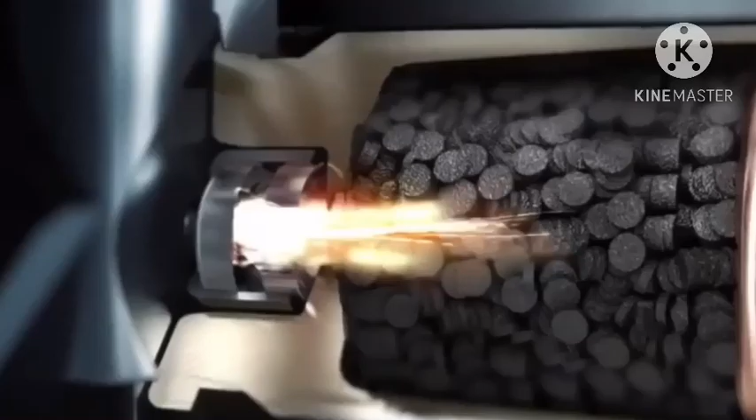Pull the station, please. Pull the station. Yeah, I don't know. Kick the tires, light the fires.

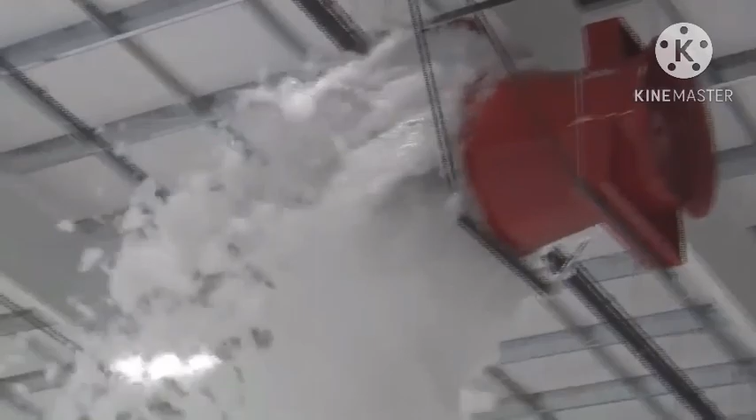Shut her down. Shut her down completely. Shut her down. All the way. Holy Jesus, they're gonna flood it right out.

Hang on, boys. Hang on tight, guys.

Hey, you wanted 8 feet originally. Guess what? You got it. Yeah, all right. Okay. Way to go, boys.

Nice. Turn it on. Okay. All right. Yeah, all right. Looks pretty good.

And that first minute, though, say that first minute, it's like... Yeah, I know, about a minute and a half. All right, yeah, it's phenomenal. I'm going to go get my sample on that.

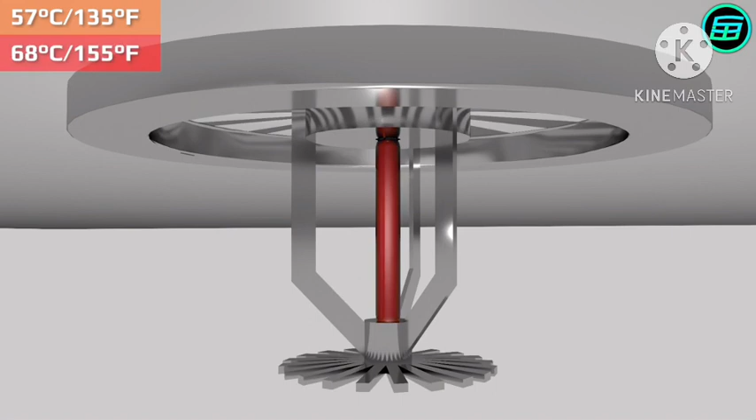There are different types of glass bulb filled with different liquids, and these are color-coded. Orange bulbs have an operational temperature of 57 Celsius or 135 Fahrenheit. Red bulbs 68 Celsius, 155 Fahrenheit. Yellow bulbs 79 Celsius, 175 Fahrenheit. Green bulbs 93 Celsius, 200 Fahrenheit. Blue bulbs 141 Celsius, 286 Fahrenheit, purple bulbs 182 Celsius, 360 Fahrenheit, and black bulbs 227 Celsius, 440 Fahrenheit.

Fire sprinkler systems operate in different ways as well. The type we've just explained is known as a wet pipe system and is the commonest in use. Each sprinkler head is activated independently and the main goal is to reduce water damage in the event of a false alarm.

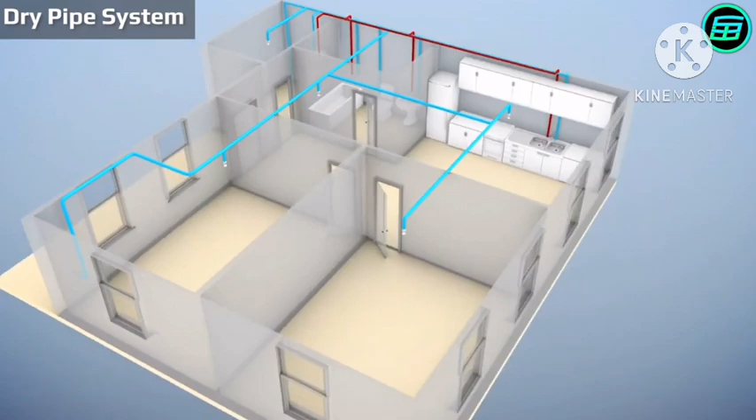Another type is the dry pipe system. In this, the pipes are filled with pressurized nitrogen which is released if a fire activates the valves in the sprinkler head. The pipes then fill with water which is discharged over the smoke or flames. Dry pipe systems are widely used in cold climates since there's a high risk of frozen pipes, preventing an emergency fire response.

Pre-action systems are a kind of dry pipe sprinkler system that require two activation steps. When heat or smoke is detected, the pre-action valve opens and allows water into the pipes. Then, the sprinkler heads can be individually activated to release water over the fire. This two-step process enables facilities to shut off the system in case of a false alarm, protecting assets from water damage. Pre-action systems are especially useful in places where accidental discharge could lead to irreparable damage, such as in museums, libraries and data centers.

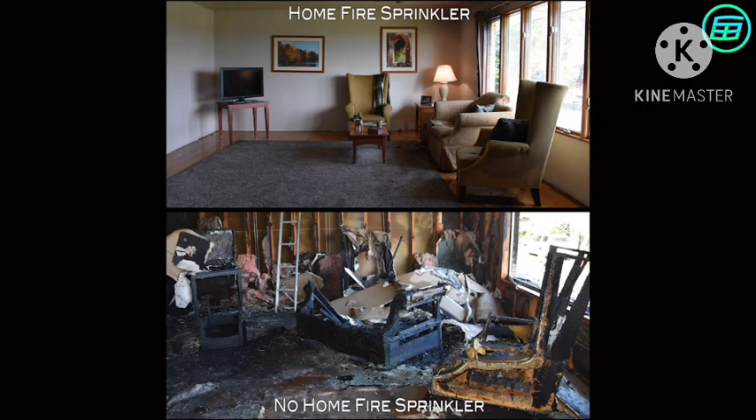Another type of system is the deluge sprinkler system, which also uses dry pipe technology. However, in this system the sprinkler heads are always open. The sprinkler heads don't have heat-sensing elements but instead are activated by external smoke or heat sensors. Once heat is detected, water fills the pipes and is released to all open sprinkler heads, creating a flooding effect across the entire area. This system is most often used in industries with flammable liquids, which pose the threat of rapidly spreading fire.

One of the most important components of a fire protection system is the automatic fire sprinklers. In general, a sprinkler is activated by the heat put off by the fire once it reaches a certain temperature at the ceiling around that particular head.

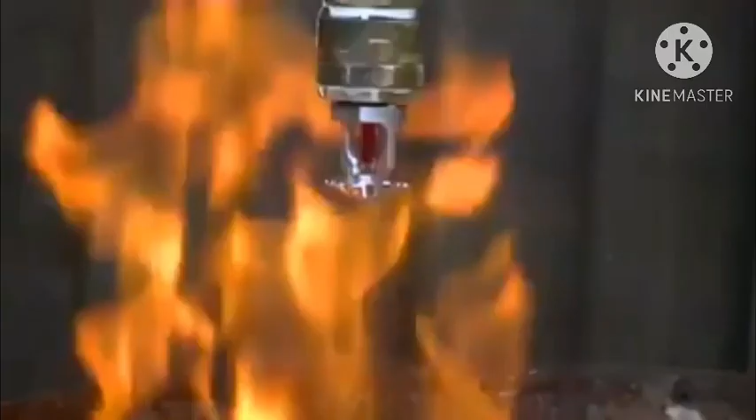A common misconception is that every sprinkler head in a system will go off at once after the first sprinkler has activated. While systems that behave somewhat like this exist, deluge-type systems, it is pretty uncommon and used in special situations like certain types of aircraft hangars. In most cases, the fire sprinklers that activate only do so around and over the fire. These systems are most effective in the fire's initial growth stage, as they work to spread a continuous flow of water over the fire, ideally dampening it enough to be fully put out.

There are several types of fire sprinklers. Wet pipe sprinkler systems are filled with water at all times, allowing for quick fire suppression. They are the most common type of sprinkler and are both cost-efficient and low maintenance.

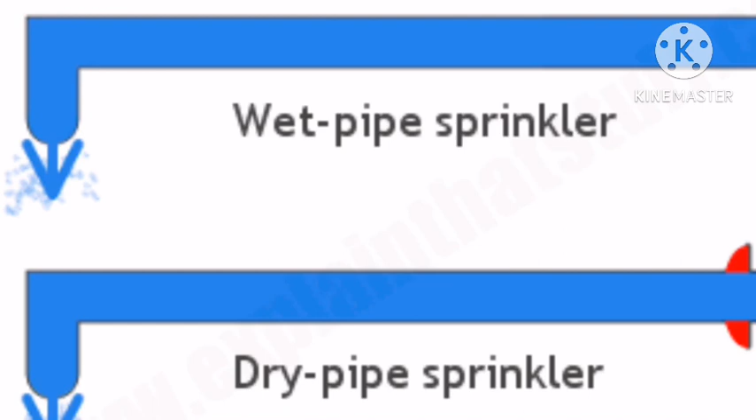Dry sprinkler systems use pressurized air in the pipe which exits before water escapes. Pre-action sprinkler systems are filled with air and water passes through if the smoke alarm or detector goes off. They are best used in locations looking to avoid accidental and unnecessary water damage such as libraries or data centers.

Deluge sprinkler systems feature open nozzles and are common to industrial parks as they respond to hazards including flammable liquids spilling across a floor. Automatic fire sprinklers.

Automatic fire sprinklers are installed during the initial construction of a building but can be updated in the case of a faulty system or in response to new codes regarding fire safety. When installing initially, the building's risk factors and layout are taken into consideration to ensure that safety is maximized regardless of the specific and unique challenges brought about from a building's design plan.

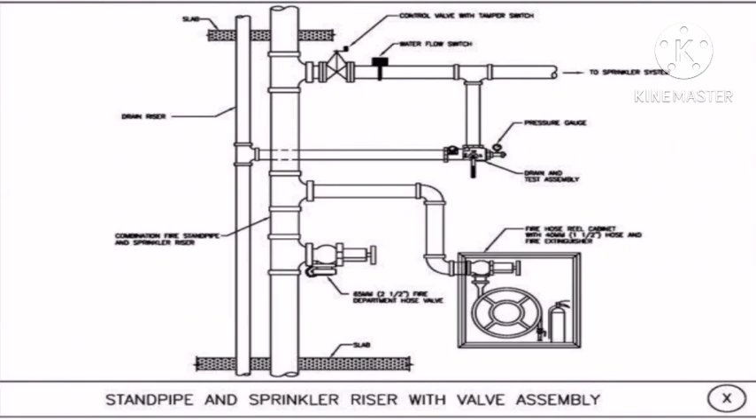Standpipes. Much like automatic fire sprinklers, standpipes are built into the initial construction of a building. They are installed in the stairways of buildings that exceed a certain height or size, but can sometimes be located throughout the walls of the entire structure, providing coverage on every floor.

These standpipes provide water flow to hose valves, which, much like fire hydrants, firefighters can connect fire hoses to. Much like fire hydrants, firefighters can utilize this connection to spray water from the building's main water source from any floor they may need to.

There are three classes of the standpipe. Class 1 systems, with 2-1/2 inch hose connections, are provided for use by fire departments and those trained in handling heavy water streams. In high-rise buildings without sprinklers and beyond the reach of fire department ladders, Class 1 systems provide water supply for the primary means of fire fighting.

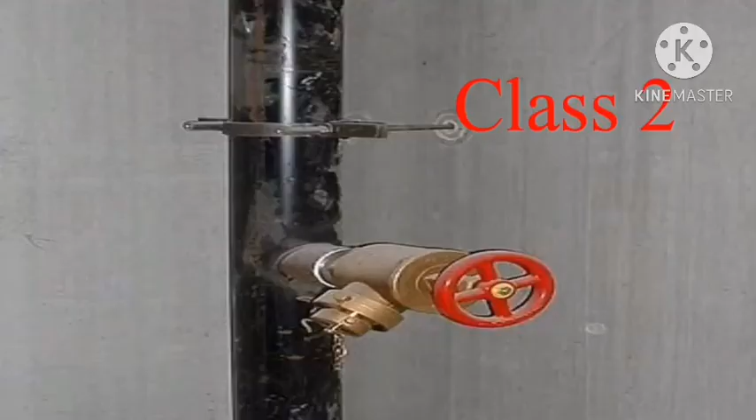That is, manually. Class 2 systems, with 1-1/2 inch hose lines, are provided for use by trained building occupants until the fire department arrives. Class 3 systems shall provide 1-1/2 inch, 38 mm, hose stations to supply water for use by trained building occupants, and 2-1/2 inch, 64 mm, hose connections to supply a larger volume of water for use by fire departments and those trained in handling heavy water streams.

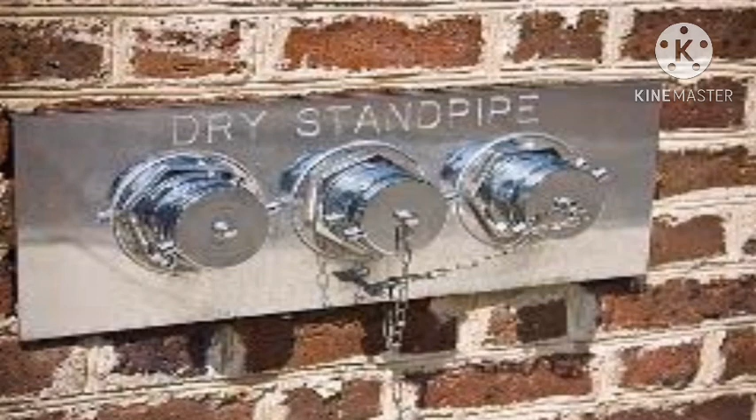Fire department connections. Fire department connections are utilized by the firefighters on the scene to either supply water to the standpipes or supplement the building's already existing water supply. This additional water can be sourced from the fire truck itself or from a hydrant that can tap into the water the building's standpipes may not have access to. These are usually included in the initial creation of the standpipes in order to provide an extra source of water to the building.

Control systems. Through the application of both physical barriers and mechanical systems, smoke control systems work to limit the spread of smoke through a building, ideally limiting the amount of damage the smoke can do to both the building and its occupants.

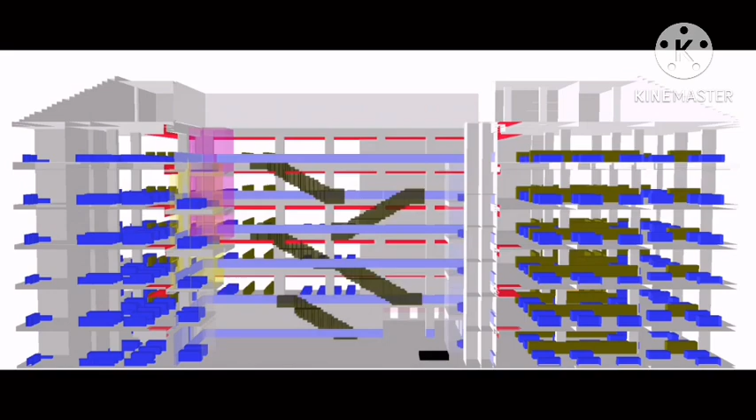The mechanical systems of smoke control include fans, dampers, doors, and shutters that all work together to isolate and contain the spread of smoke. These are generally installed in the initial construction of a building as well, and work in conjunction with sprinkler systems to prevent as much damage as possible to the structural integrity of a building.

Fire alarm systems are put in place in order to alert a building's occupants in the event of a fire. These are installed in every room of a building and are highly regulated by fire safety laws.

Generally, these can be automatic or manual alarm systems. Automatic alarm systems can detect heat or smoke and emit a high-pitched alarm throughout the building. Manual alarms must be pulled by a building's occupants, and include simple instructions on how they can be used. Both types of alarms can emit a visual cue as well, seen as a bright flash.

Before diving into the sprinkler system, let us go through some basic information related to firefighting. The fire triangle is a scientific principle that is important for all people to be aware of. Understanding how fires sustain themselves is essential background information in situations where you may have to use fire safety equipment.

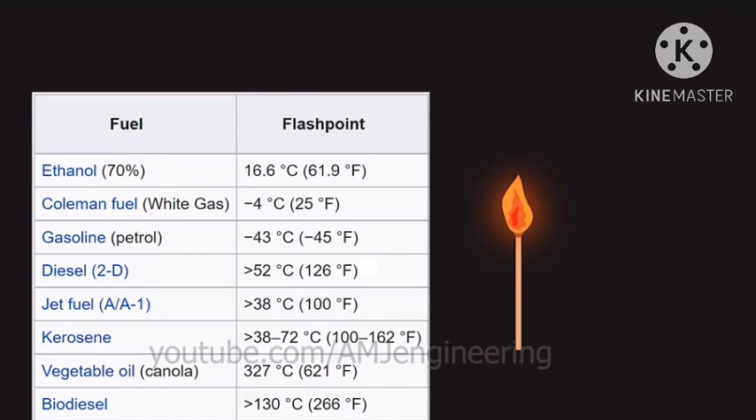The fire triangle, or combustion triangle, is the three components needed to ignite and sustain a fire. The three ingredients of a fire triangle are heat, fuel, and oxygen. First, a source of heat is required for ignition to occur, and different materials have different flash points. Flash point is the lowest temperature at which the material ignites.

Second, a fire cannot begin if there is no material to burn. Homes and businesses are full of flammable materials, such as paper, oil, wood, and fabrics. Any of these can serve as a fuel for a fire.

Third, to sustain the combustion reaction, oxygen is needed, as it reacts with the burning fuel to release heat and CO2. Earth's atmosphere consists of 21% oxygen, so there is plenty available to trigger a fire if the other two components are present. Fire blankets and certain fire extinguishers remove the oxygen side of the triangle by removing it or displacing it, causing suffocation, and thereby ceasing the combustion reaction.

So, here are some facts about the fire triangle that we should keep in mind. Normal air contains 21% oxygen. Fuel may also contain oxygen. Heat sources include the sun, hot surfaces, sparks, friction, and electrical energy. Fuel sources can be a solid, liquid, or gas.

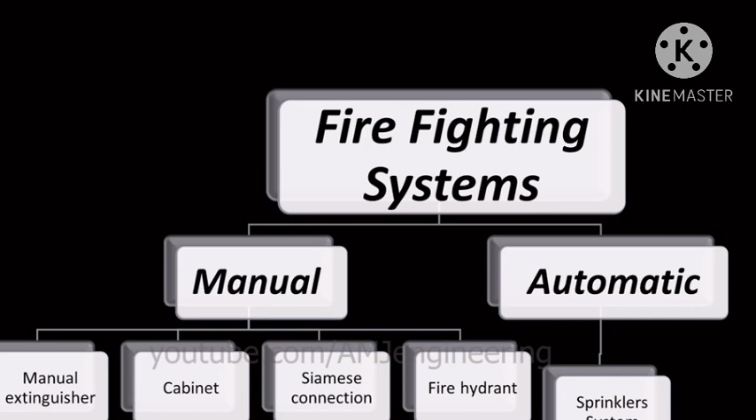Firefighting systems are classified either manual or automatic. Manual firefighting systems include extinguishers, fire cabinets, Siamese connection, and fire hydrants. These require the physical intervention of manpower to fight the fire. Automatic systems, as the name says, fight the fire automatically without the intervention of a human being, and that's what a sprinkler system does. Here is a schematic diagram of the system components.

Usually both systems exist in all buildings to form a competent firefighting system matching the NFPA standards. In any building, the system consists of three basic parts: a large store of water in tanks, either underground or on top of the building, called fire storage tanks, and a specialized pumping system. This usually includes three types of pumps: jockey pump, electric pump, and diesel pump.

You can refer to my video about the fire pumping system for more info. A large network of pipes ending in either hydrants or sprinklers. Nearly all buildings require both of these systems.

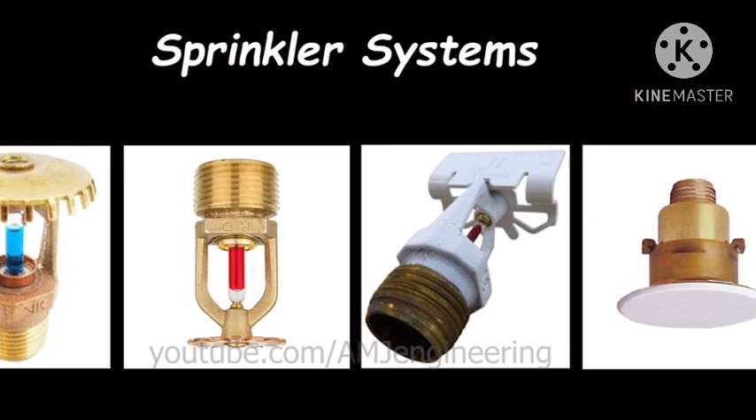Sprinkler systems: when it comes to the sprinkler head itself, the four most common styles of sprinklers are the standard spray upright, standard spray pendent, sidewall sprinkler, and concealed sprinkler head.

Nearly all fire sprinklers are composed of the same components: a sealing assembly or plug that prevents water from escaping, a heat-sensitive element that allows water to flow at a given temperature, a deflector that distributes water effectively, and a frame. The sprinkler's temperature rating is the temperature at which the sprinkler will activate.

Options range from 135 to 650 degrees Fahrenheit. These ratings can be identified by the color of the liquid inside the bulb in the case of glass bulb sprinklers. The selection is taken from NFPA 13 Table 7.2.4.1 based on the hazard class for the structure that the fire sprinkler system is protecting.

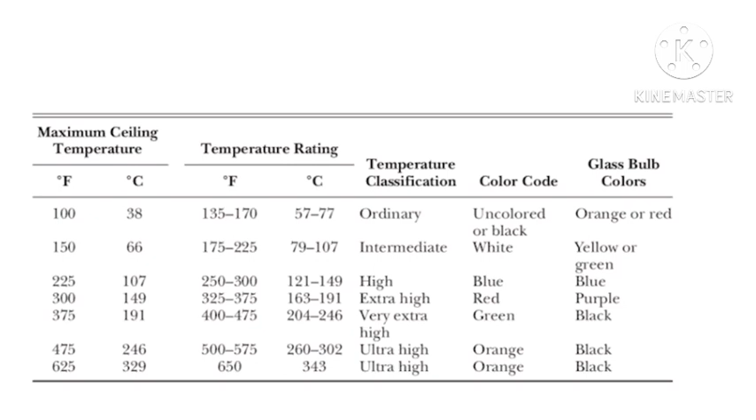Upright sprinkler heads spray water upward to a concave deflector, like an umbrella, producing a dome-shaped spray pattern. Rather than descending through the ceiling, these sprinkler heads are usually mounted on pipes just below the ceiling. Upright sprinkler heads are efficient at dispersing water between obstructions. Thus, they are frequently used for rooms that are inaccessible, such as mechanical rooms, warehouses, and industrial spaces. They are also often applied in structures with open ceilings.

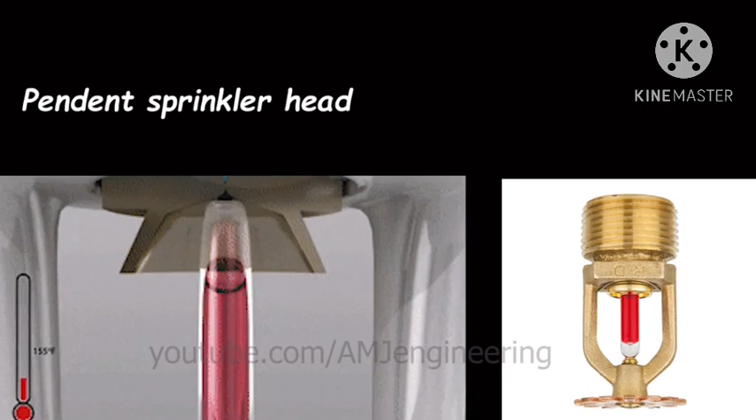The pendent fire sprinkler head is the most common type that you will see. Pendent sprinkler heads descend from the ceiling with a convex, circular gap deflector plate on the bottom. When the sprinkler heads activate, they send a stream of water downward onto their deflectors, which then disperse the water widely, side to side, throughout the room in a conical pattern.

Sidewall sprinkler heads protrude horizontally out of the wall parallel to the floor, rather than descending from the ceiling or mounted on a pipe pointing upward. Sidewall sprinklers are ideal for small spaces, such as hallways, spaces with obstructions, and where ceiling piping is not available.

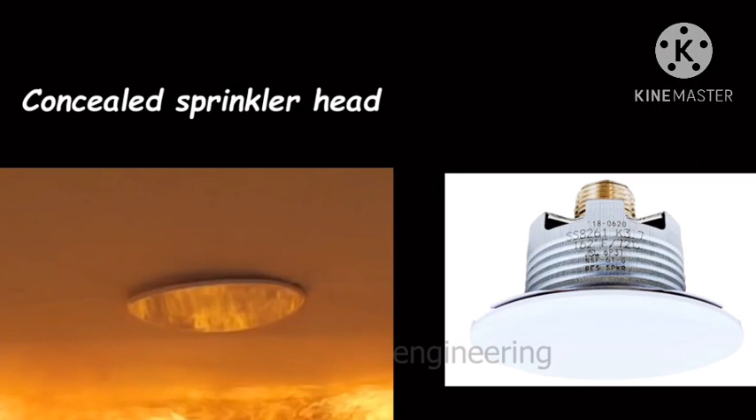Concealed sprinkler head: this heat-sensitive plate detaches at temperatures roughly 20 degrees lower than the fire sprinkler head, allowing the concealed sprinkler's deflector to drop and the head to activate.

Now we have covered the most common sprinkler head types. Let's go ahead and discover the fire sprinkler system types. There are 4 main types of systems: wet pipe system, dry pipe system, pre-action system, and deluge system.

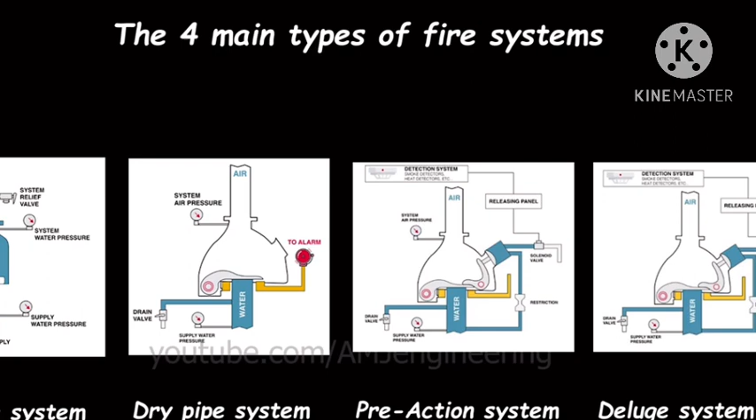Wet pipe sprinkler systems. Here are the components of a wet sprinkler system. In addition to the water supply, piping, and sprinklers, these systems have a backflow prevention device, control valve, main drain, fire department connection, and water flow alarm.

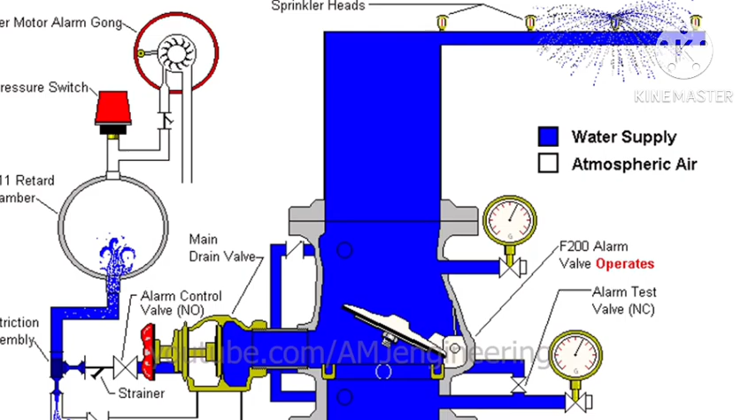Wet pipe sprinkler systems always contain water in the riser and piping. As soon as a sprinkler head activates due to the heat of a fire, water is immediately discharged through the open head.

Dry pipe fire sprinkler systems are very similar to wet pipe systems with one major difference: the pipe is not constantly filled with water. Instead, the water is held behind a dry pipe valve, usually some distance away from where the sprinklers are located.

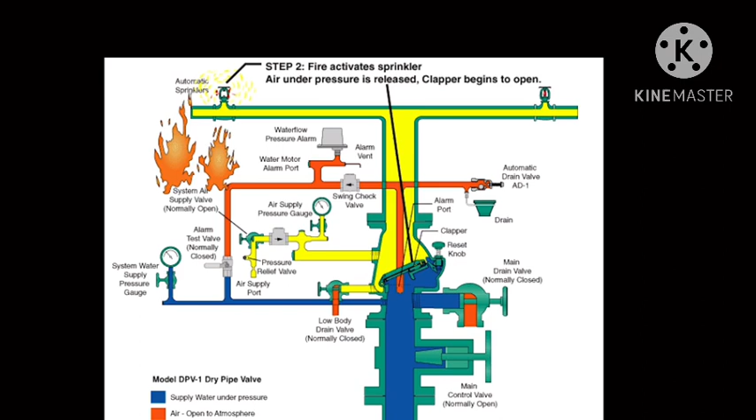Like a wet pipe system, when the temperature at the ceiling becomes hot enough, the glass bulb or fusible link of the sprinkler breaks. However, in this case, water isn't immediately available because the pipe is not water-filled. Instead, air is released from the now open sprinkler head. This creates a drop in pressure, causing the dry pipe valve to open and water to fill the system. Water will then flow from the open sprinkler head.

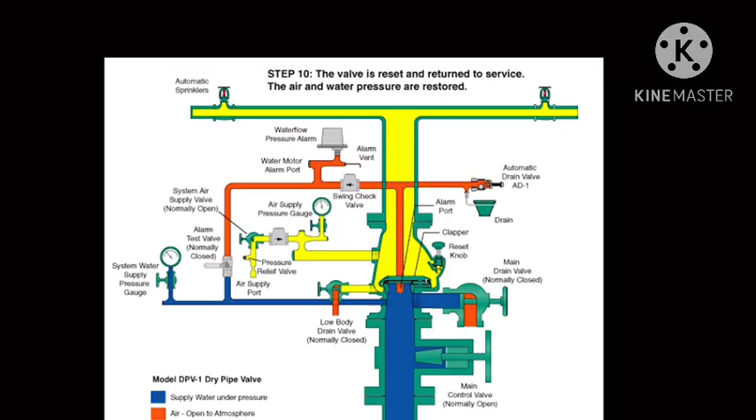Since there is a delay between sprinkler operation and water flow, the size of dry pipe systems is limited. The size limitation is intended to minimize the amount of time water delivery is delayed. A dry pipe system is a great option for unconditioned spaces, or locations where the temperature cannot be guaranteed to be high enough to prevent water in the system from freezing.

Pre-action system: a pre-action type sprinkler system employs the basic concept of a dry pipe system in that the sprinklers are closed and water is not normally contained within the pipes. One difference, however, is how water is admitted to the system. Water introduction into the system's piping is initiated by opening of a normally closed, mechanically latched valve known as a pre-action valve.

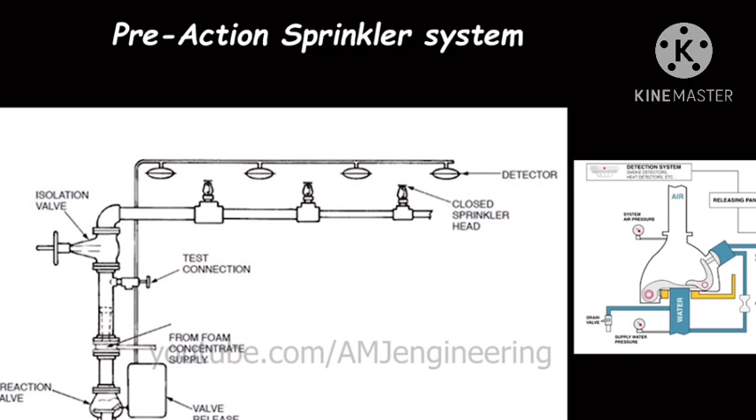Means of operating the pre-action valve depends on which of the 3 types of pre-action systems, non-interlock, single interlock, or double interlock, is installed. Pre-action valve operation is dependent upon one or two of the following events occurring: sprinkler activation and detection device activation.

A non-interlock system requires only one of either event to occur before water is admitted into the system. A single interlock system is activated only upon the event of detection device activation.

However, in a double interlock system, the 2 separate events must happen before water is admitted into the system: sprinkler activation and detection device activation.

Deluge systems are similar to pre-action systems in that they use another type of detection for operation. However, the biggest difference is that deluge systems use open sprinklers or nozzles. Instead of getting water flow from individual heads that have operated, once water fills the system, water will flow from every sprinkler head.

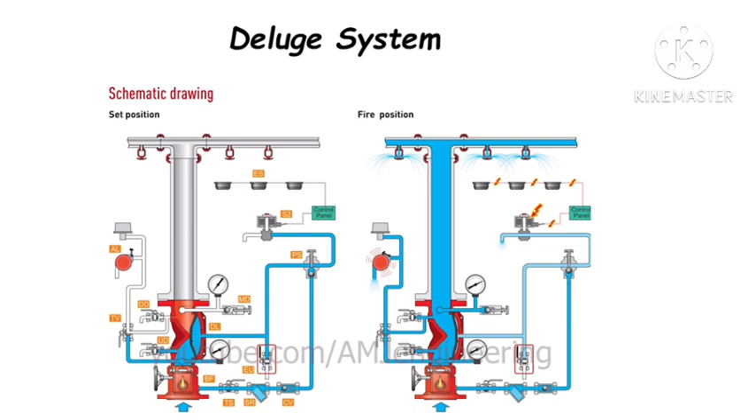Much like a pre-action system, a deluge valve will keep water from filling the system until the operation of another type of detection system, such as smoke detection. Once the detection system is activated, water not only fills the system, but flows from the open sprinklers or nozzles.

An important consideration in the selection of the type of sprinkler system is the level of hazard being protected. If protecting an area of very high hazard, such as aircraft hangars, a deluge system may be the most suitable.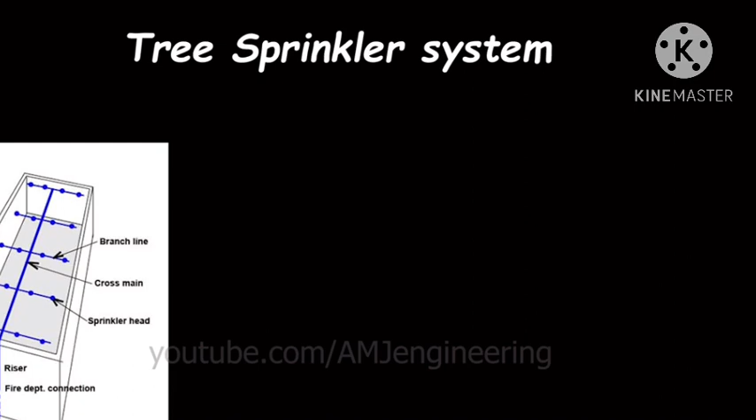Automatic sprinkler system design: the layout of fire sprinkler systems is usually one of the following. Tree sprinkler system: it is the normal design system, and it consists of a main pipeline with branches on both the left side and right side.

Grid sprinkler system: a sprinkler system in which parallel cross mains are connected by multiple branch lines. Looped sprinkler system: a sprinkler system in which multiple cross mains are tied together so as to provide two paths for water to flow to an operating sprinkler, and branch lines are not tied together.

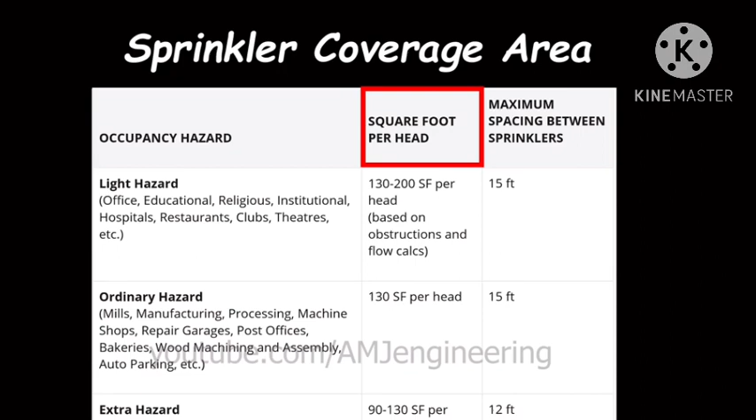The maximum area of coverage per sprinkler head depends on hazard classification and sprinkler mounting orientation, that is, sidewall or overhead. Sprinkler head spacing: the table below shows sprinkler spacing requirements based on NFPA 13. For example, in a light hazard office area, the maximum coverage area per sprinkler head is 200 square feet, and the maximum design spacing between sprinklers is 15 feet.

The maximum distance of sprinkler head from wall is half of the maximum distance between sprinkler heads. Minimum distance between sprinklers is typically 6 feet.

Let us take an example: an office area of 90 by 60 feet. Assume we want to design a tree sprinkler system. Let us go ahead and lay out the piping system and sprinkler heads. Being a light hazard, the maximum spacing between sprinklers is 15 feet. The distance between sprinklers and walls is no more than half the distance between sprinklers.

The water demand for firefighting sprinkler systems shall be determined by either the pipe schedule method or the hydraulic calculation method. According to NFPA 13, a pipe schedule system is defined as a sprinkler system in which the pipe sizing is selected from a schedule that is determined by the occupancy classification, and in which a given number of sprinklers are allowed to be supplied from specific sizes of pipe.

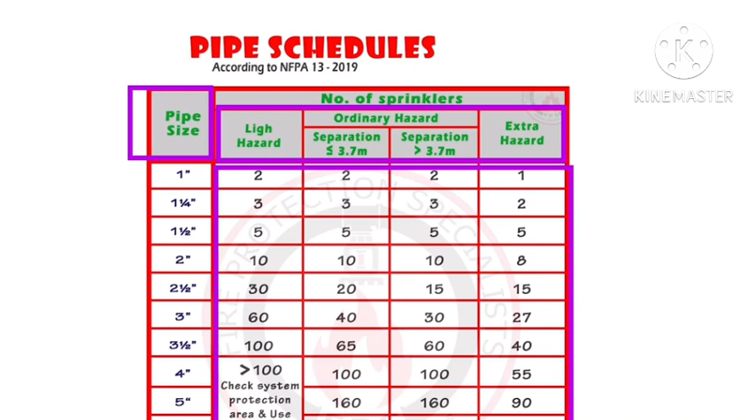Since our space is considered light hazard, and having no more than 2 sprinkler heads on each branch, the size of all branches is 1 inch.

For the main line, always start from the end. This portion is feeding 4 sprinkler heads, so its size should be 1.5 inches. This portion is feeding 8 sprinkler heads, so its size should be 2 inches. And all the rest are 2.5 inches because the number of sprinkler heads is more than 10 and less than 30.

Now, what is the minimum water supply requirement for pipe schedule systems? The table below summarizes the minimum water flow rate, residual pressure, and duration of pipe schedule systems. Therefore, 500 GPM multiplied by 30 minutes means a minimum of 15,000 gallons water tank shall be constructed.

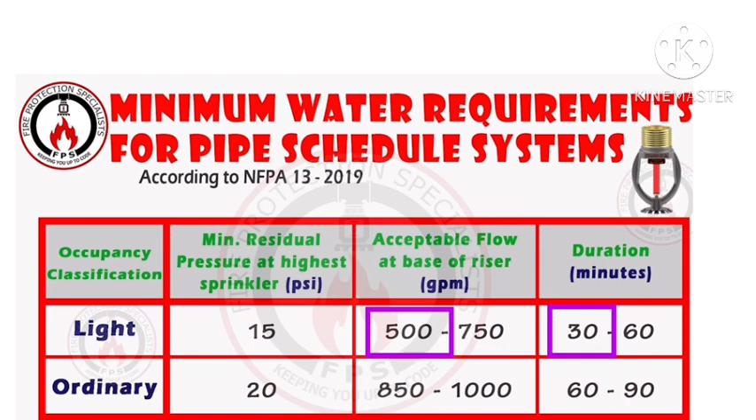A breakout of a floor control riser assembly. The following is a full arrangement for a combination standpipe sprinkler riser where high pressures necessitate a pressure-reducing valve at each level. While every element in this specific arrangement is certainly not a necessity on every project, here are some considerations that go into the requirements for a layout like this.

Auxiliary drain valve: permits faster draining of the system, as opposed to only draining through the inspector's test valve. Check valve: can help reduce false water flow alarms on floors where sprinklers have not activated.

Drain pipe size: 3/4 inch for 2-inch system pipe, 1¼ inch for 2.5 to 3.5 inch system pipe, or 2 inch for 4-inch system pipe. Drain valve minimum size: 3/4 inch for 5 to 50 gallon system, 1 inch for above 50 gallon system.

Drain riser: discharge must be to outside or to a drain capable of handling the flow. Size must be at least 1 pipe size larger than the largest drain connection tying into it.

Inspector's test: must be accessible and must discharge outside or to a drain capable of handling flow. Must be downstream of the water flow alarm.

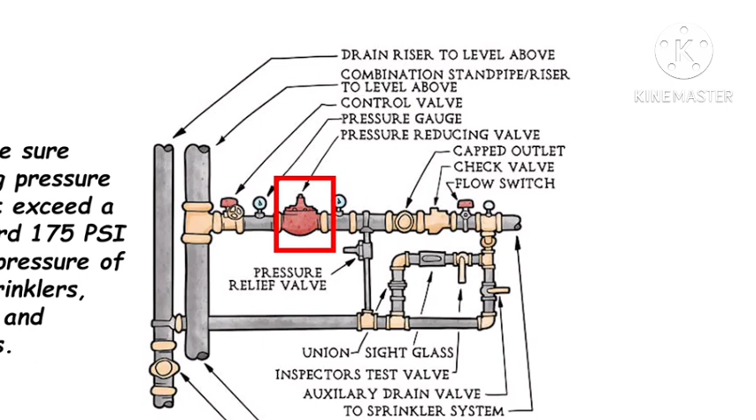Pressure gauge: required at each floor control valve. Pressure reducing valve: provided to reduce the system pressure such that the working pressure will not exceed a standard 175 psi listed pressure of the sprinklers, piping, and fittings.

PRVs can also be used to limit the system pressure to higher amounts when pressures are allowed to exceed 175 psi. Control valve for the entire riser is required to permit isolating a riser without interrupting other systems.

Size of minimum 4 inch, unless hydraulically calculated to permit a smaller size. Sight glass enables easy verification of water flow for the inspector's test.

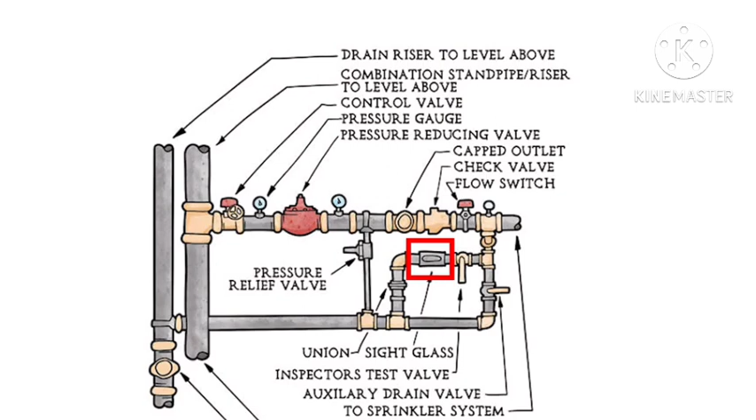Floor control valve: must be accessible, electrically supervised or locked, signage must be provided, and shall be tested annually. Water flow switch is used in wet sprinkler systems to detect the flow of water and to send an alarm signal.